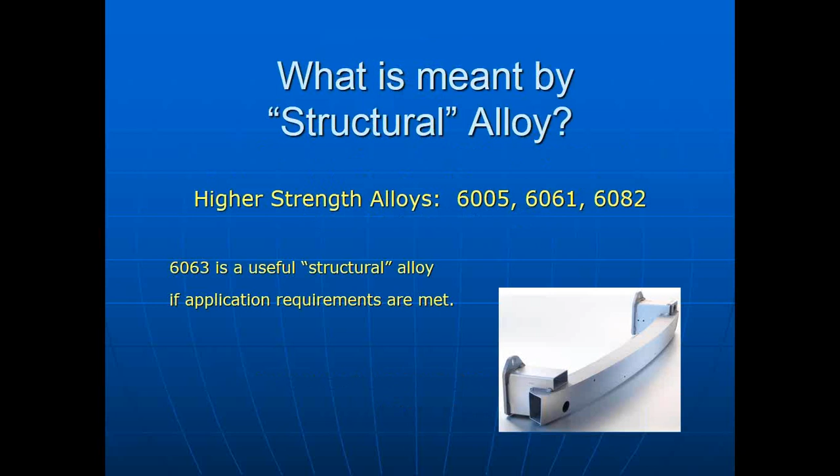So what are temper specifications? Temper specifications specify a processing regimen and then with it the associated properties. You can go on MatWeb and look up 6061 T6 and it will tell you what the minimum yield strength is, what the ultimate strength is, and those kinds of features. The first two letters are the general category, and then additional numbers in the sequence are more specific processing.

So let's look at those. T0 is fully annealed. As the product exits the quench, the profile, it will be in a T0 state. It will have no grain structure, and it should be fully solutionized and not have any precipitates.

T4 is the specification for natural aging. The 6000 series of alloys, if left at room temperature, will harden naturally over time and will reach T4 properties. It will be over an extended period of time. It's not very practical for commercial applications, so you very seldom see this specification used.

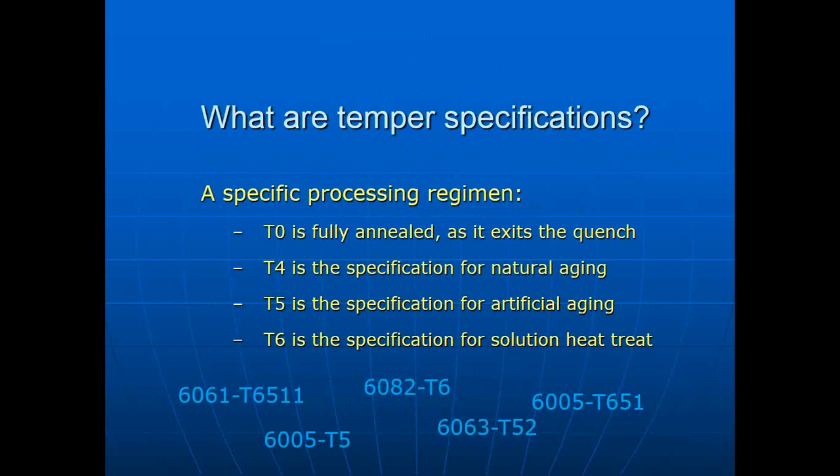T6 is the specification for solution heat treat. That, in all alloys except 6000, requires a secondary step for solution heat treat. With the 6000 series of alloys, T6 becomes a properties specification. The values for strength and hardness are higher than for T5, and there's an implied method of processing.

T6 means solution heat treat, but in the ASTM specification there's what's called footnote 9, which says 6000 series does not require solution heat treat. So the processing method is not mandatory with 6000 series alloys. What this means is that you may do your quench process in line at the press exit.

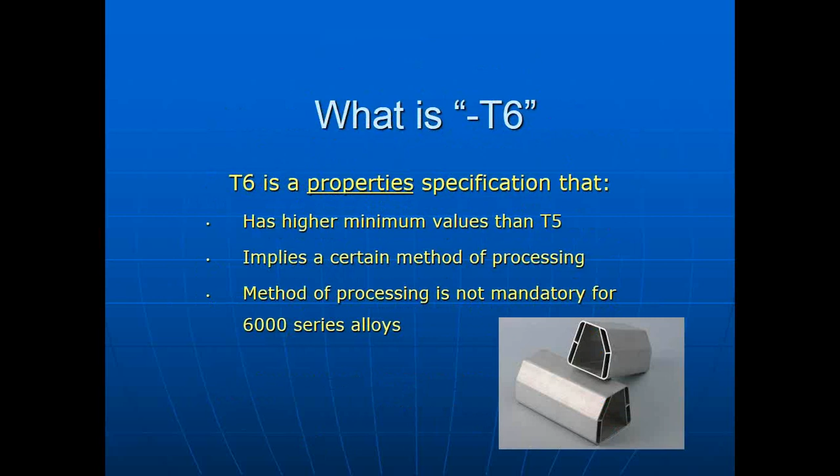And in fact, because of all the savings in labor and handling, the vast majority of 6000, essentially all of them, when you purchase a 6000 series alloy in T6, will have been through a press quench process. So it's implied solution heat treat, but really it comes back to a property specification. Are you making tensile? Are you making hardness? And so on.

We're going to be talking about this press quench process and focusing most of our time on it. But I'm always careful to take a step back and note that it is not only the press quench that defines properties. And in fact, you can fail properties at 5 different stages. Let's look quickly at 1, 2, 3, and 5, and then we'll come back and focus on profile quenching.

The first is the processing of the ingot, billet or log. The structural alloys are very sensitive to precipitation, growth of mag silicide, again, we're going to get into that in a minute, between 600F and 800F. And if you have reason in your heating equipment to hold a log in that range for some period of time, you will develop large enough precipitates that you will not be able to resolutionize as you go through the press, and it will lead to product failures.

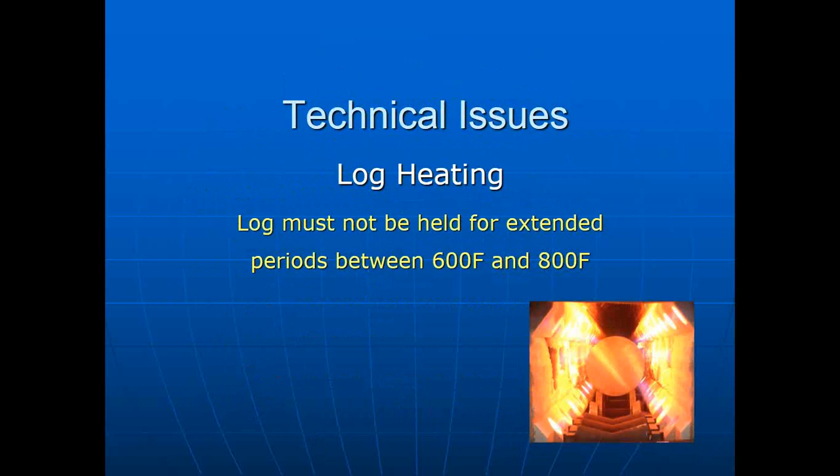The intent with the structural alloys is to return all magnesium and silicon into solution as the metal flows over the bearing surfaces in the press, and specifically in the die inside the press. You have tremendous heat from deformation as you're going through the bearing surfaces, and that normally will return the magnesium and silicon back into solution. We have minimum temperatures to achieve that. They're different for each alloy. 6061, a very common structural alloy, is 1010 Fahrenheit.

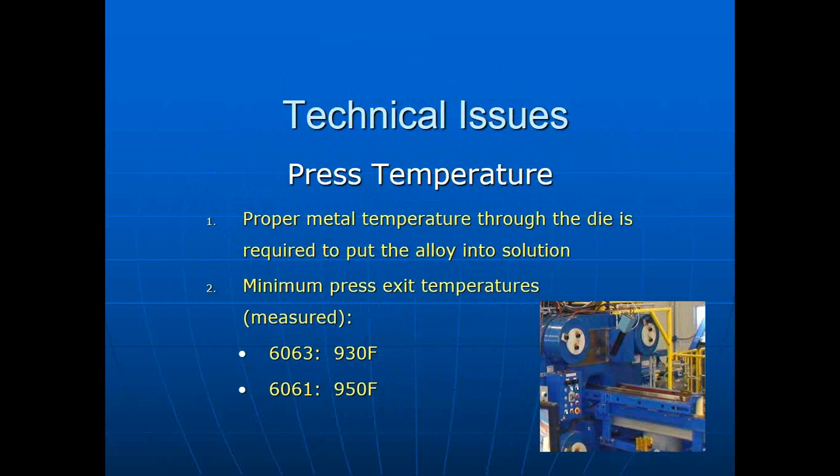The problem is that there's no good way to measure that temperature because the profile is touching all the bearing surfaces as it flows through. There's no external observation point. You can't put a port on the side of it and look in because the bearing surfaces are forming the part. So what is used commonly by your suppliers is the exit temperature from the press. So we observe the temperature as the material comes out of the press, and from that we draw the inference as to the temperature that it went across the bearing surfaces. And very commonly used for 6061 is 950 Fahrenheit. We're looking for an exit from the press above 950 to assure that we got the 1010 back in over the bearing surfaces in the die.

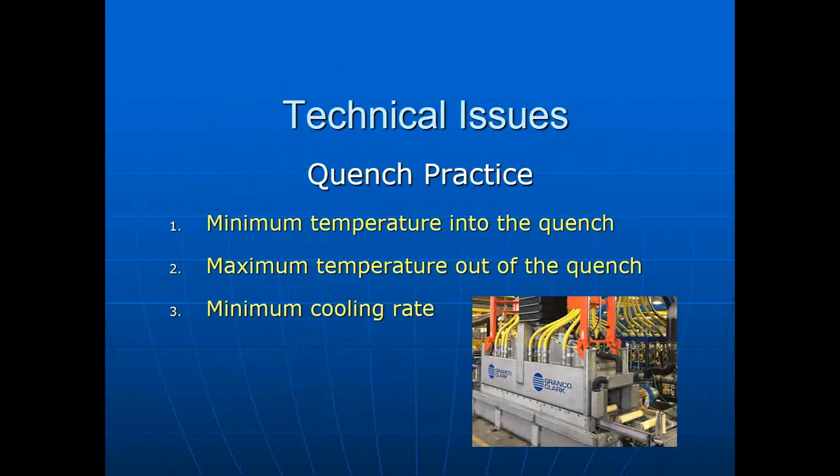Quench practice we're going to focus on extensively, but we will come back to these three primary factors. There's a minimum temperature into the quench. It has to come in hot. There's a maximum temperature out of the quench. It has to come out colder than a temperature. And we need a specified cooling rate between the two. And again, we'll come back to this.

Then, once the lineals are extruded and cut into mill lengths, they're run through an artificial age practice. Artificial age is required to meet T5 or T6 properties. Age practice fails by either overaging or by underaging. So there's a specified window that has to be met. And finally, floor age or delay between the time a lineal is extruded and when it goes into the age oven will impact properties. And this is especially true of the alloys with excess magnesium like 6061 and 6351.

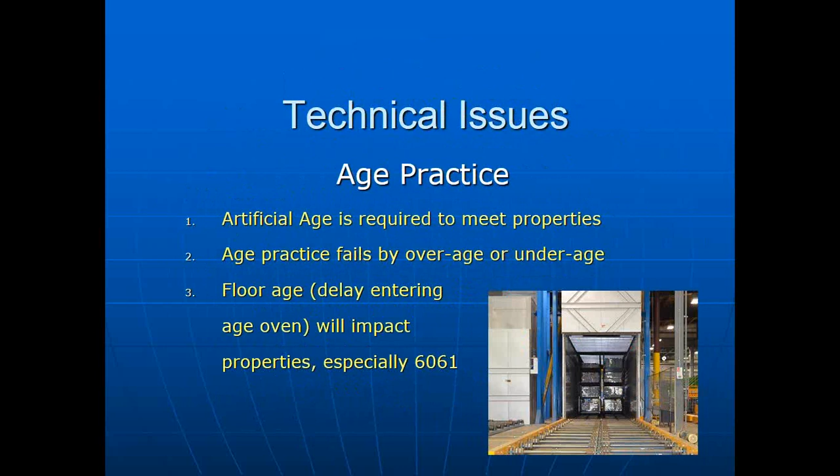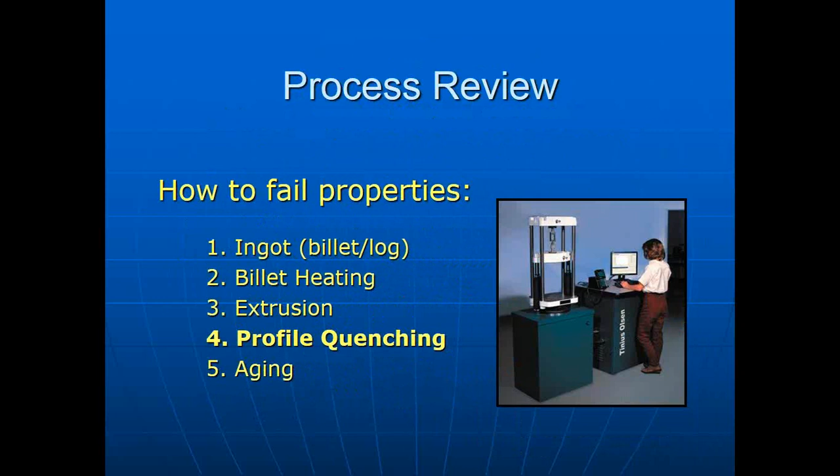So we've looked at the other four in overview. And again, just as a reminder, every step has to be done properly. There is no effective remediation, okay? If I don't get the extrusion temperatures right, I can't at the age oven fix the problem. If I don't get the quenching right, I can't at the age oven remediate in some way. Every step needs to be done correctly.

The first and most important concept in press quenching of 6000 series alloys, which is very different than if you're coming, say, from the steel industry, is that quenching is a preventative process. It is not an active process. It does not give you properties. It prevents the growth of undesirable characteristics. And that sort of turns it on its head if you've done anything around quenching with steel, because quenching here is a purely preventative process. It accomplishes nothing, literally. But if you don't have it, you'll get something you don't want.

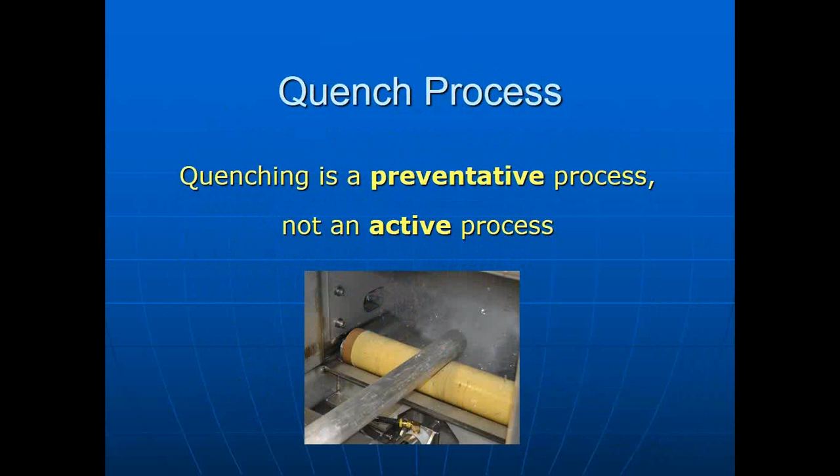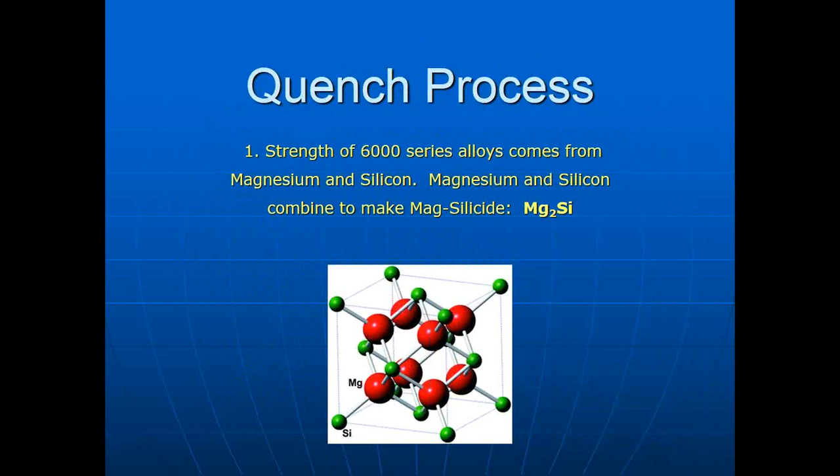The strength of 6000 series alloys comes from the primary alloying materials of magnesium and silicon. Magnesium and silicon combine to make mag silicide, or Mg2Si. You'll hear me typically call it mag silicide. And this is the alloying material that provides the strength in 6000 series alloys. Meeting properties requires fine mag silicide precipitates well distributed throughout the profile.

And the best illustration I have of this is sand versus boulders. What we want is a profile that is full of mag silicide sand but doesn't have any mag silicide boulders in it. You could compare this to cement. Portland cement, like raw aluminum, is not particularly useful. You can sort of almost grout with it, but it's not particularly useful. You put aggregate in it to make it stronger. But if you were pouring a 4-inch driveway and you threw a bunch of 3 to 4 inch diameter stones in the mix, you would have a real problem. You would have holes, you would have cracks, all kinds of problems. You need aggregate, but it has to be a lot finer. The same here. We're looking for very fine particles evenly distributed throughout the product.

If you have large chunks, that's a technical term, large chunks of mag silicide, they do two things. First, they rob mag silicide from the surrounding aluminum, which weakens it, and then they form a stress riser, so it's a place for the crack to propagate. So large precipitates are not desirable.

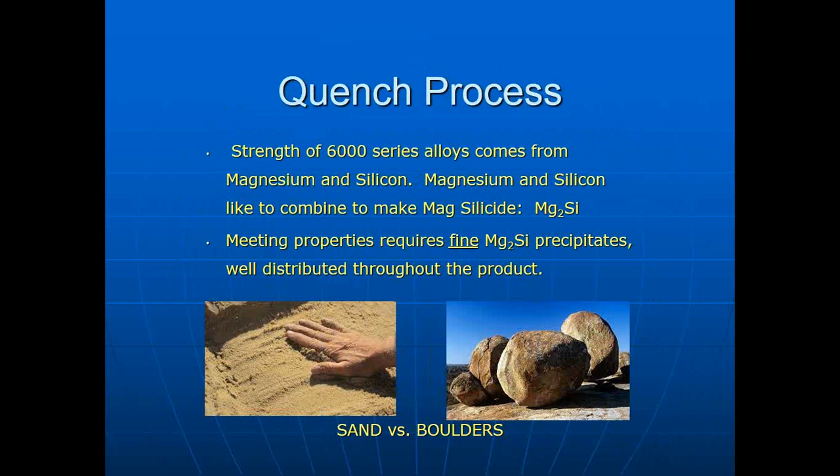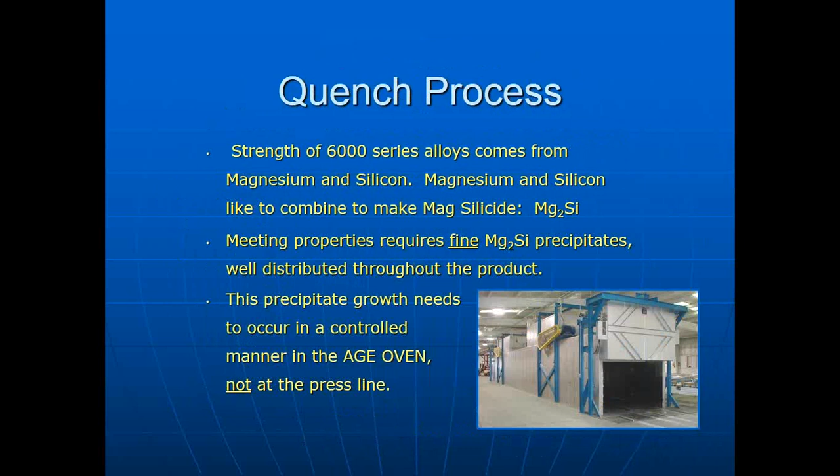Where we grow the fine precipitates, the sand, is in a controlled manner in the age oven and not at the press line. So the goal of our quench is, ideally, to have zero precipitates at the press line and do all the work in the age oven. Now, as a practical standpoint, obviously, we can't do things instantaneously, so there are some precipitates, but we very much want to minimize precipitates on the press line. So how do we minimize precipitates on the press line? We have a roadmap. Our industry uses a roadmap called the C-curve, or the C-curve graph.

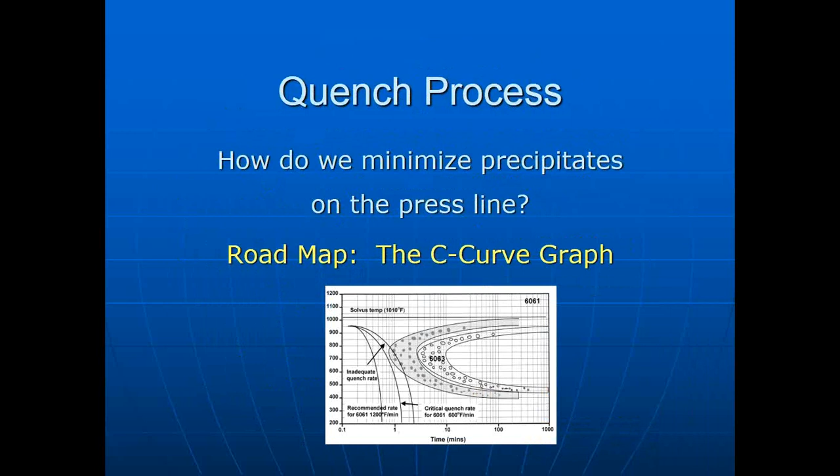Let's zoom in on this and take a look at it. Every alloy has its own C-curve, and we see two of them in this C-curve chart, because this particular chart that I got courtesy of Rio Tinto, which is the current name for Alcan aluminum, contrasts 6063 alloy in the pale curve and 6061 in the shaded curve. Important things about a C-curve: on the left side you see the temperature scale, and it is linear. On the bottom, you see the time scale, and it is logarithmic. And that's important to note because the 63 and the 61 graphs, for instance, don't look all that different. But if you look at the nose, the point of the C-curve right out here, the 6063 represents 3 minutes, and the 6061 represents 40 seconds.

These regions, these bounded regions, are where you will have unacceptable precipitation. If you hold a 6061 lineal at 650 degrees for 40 seconds, you're done. That profile will not make properties. You will have grown too many stones and boulders, and again, it's not remediatable in a practical way. This graph shows that very well. I will go to the next slide for that.

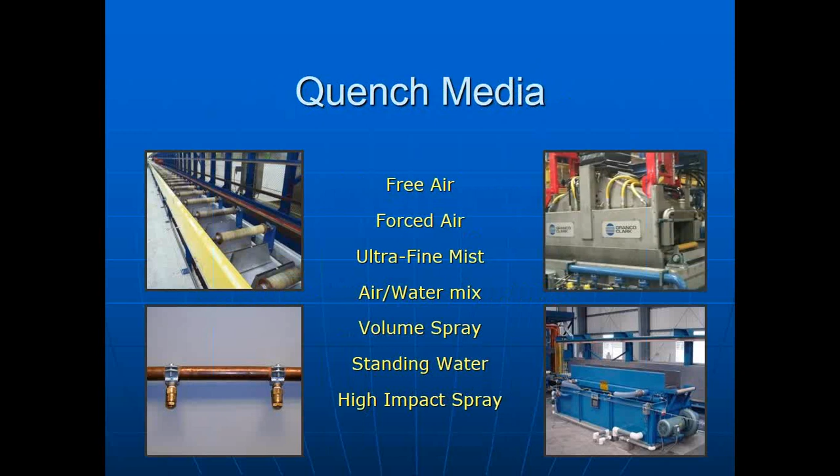As we move down, then we get to forced air. Forced air is very useful. You can do a lot of cooling. The performance metric is velocity at the part. You can compare two air cooling systems if you can determine the velocity at the part in each one. If the velocity at the part is 5,000 feet a minute on this one and 6,000 feet a minute on that one, the 6,000 is going to cool more than the 5,000.

There's a couple of key formulas that I listed there. Cooling rate is velocity to the 0.7 power. But horsepower is velocity cubed. And noise is velocity to the 4. At some point, these turn into whistles. What these numbers do is they give us a practical maximum of forced air of about 10,000 feet per minute. If you're running much faster than that, your horsepower gets crazy, the nozzles get very noisy,

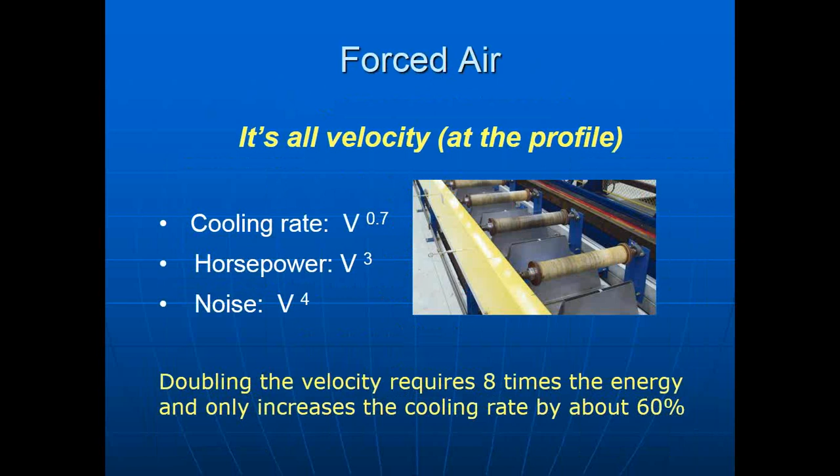lots of problems. And to illustrate where these numbers end up, if you double the velocity, as at the bottom of the slide, it requires 8 times the horsepower, and your cooling increases 62%. So you don't even get a doubling of cooling rate for 8 times the power. So at some point, multi-hundred horsepower fans, it just gets crazy. So we need to move beyond forced air. Forced air typically can only work for the very thinnest of structural profiles. With 6005, I have some customers who are making properties with forced air, but as soon as you get to 6061 or 6082, you're looking at doing something beyond forced air.

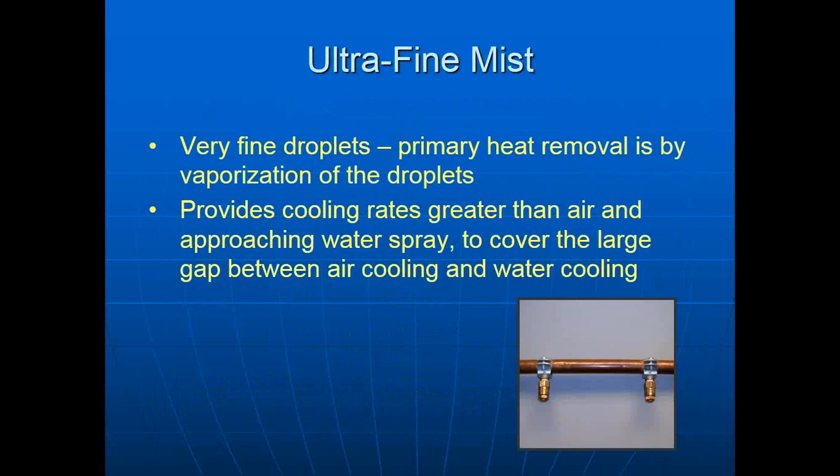We have incorporated in some of our units an ultrafine mist system. The ultrafine mist uses nozzles that create very fine droplets, and the primary heat removal is actually the vaporization of the droplets. If you calculate the temperature of the mist, you'd think it shouldn't be able to do that. But what's happening is you're actually flashing off the droplets and creating cooling rates approaching that of a traditional water spray. We did that to span the gap from the maximum air cooling and the minimum water cooling, because there's a big gap between those two, and that can be partially filled with an ultrafine mist subsystem.

The next step then is water spray. These would be larger nozzles, and this would look more like a traditional spray that you would think of, hundreds of gallons per minute. With the spray nozzles, you have the ability to adjust cooling rate. You can adjust the flow, adjust the volume, select which nozzles are on and off, which gives you ability to direct the spray and have some controllability.

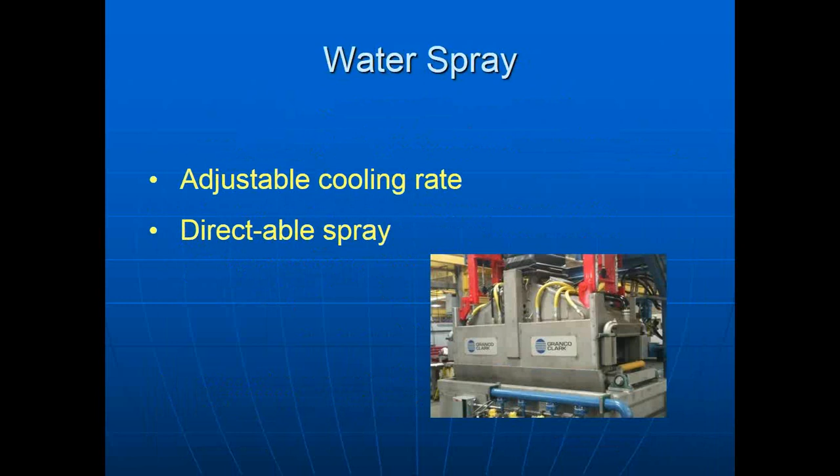Moving up from spray is the flood quench. This comes in the water wall style, where the profile flows into and out of a standing wave of water, and also the dip quench, where the entire profile is dipped in a trough located typically next to the lead out. So the profile, after it's produced, is dipped in its entirety into the trough and removed.

Flood quenches have quite a good average heat transfer rate. Their big limitation, and the reason why they have fallen out of favor in the industry, is there is no control of cooling rate or anything else. You put it in the water, it comes out. What you get is what you get. And you have no adjustability. So while they cool quite well, if you're wrestling with geometry, distortion, and such things, you really don't have any tools to address them.

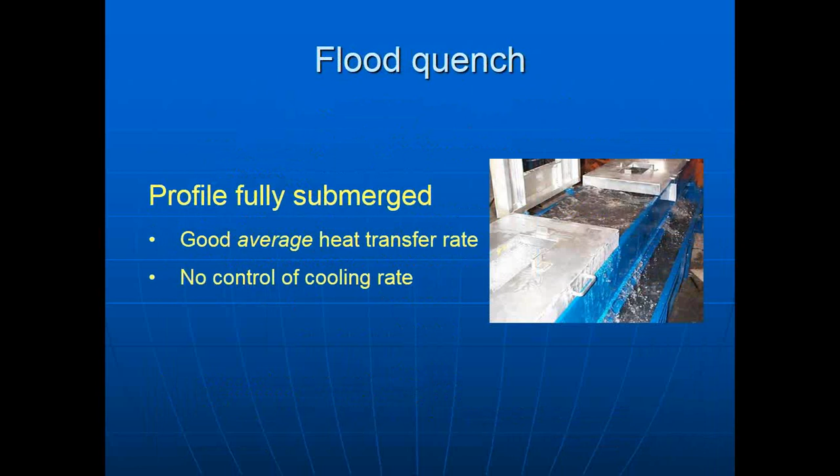Finally, the highest performance system is high pressure or high impact velocity spray. Here, the water droplets are accelerated fast enough that they affect the steam barrier that forms around the part and provide the maximum heat transfer rate that's available.

In our case, we share the same nozzle array as our standard spray. So we can give you a normal water spray and a high pressure spray with a single set of nozzles just by changing the pressure. But by knocking down the steam barrier or allowing the steam barrier to reform, you have some very significantly different performance characteristics. So it really is like having two completely different modes or medias, even though it's the same nozzle.

Again, you have directable spray. You can select the pressure, you can select the direction, you can turn off nozzles entirely, so you have some control. Those are the typical design options for press quenches.

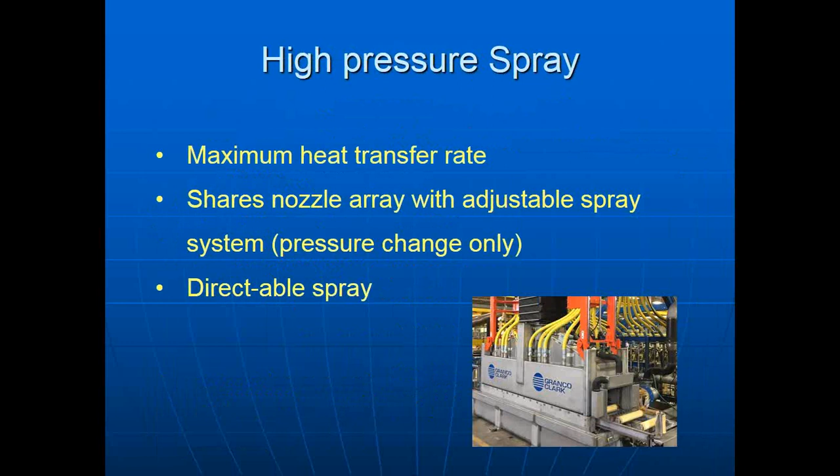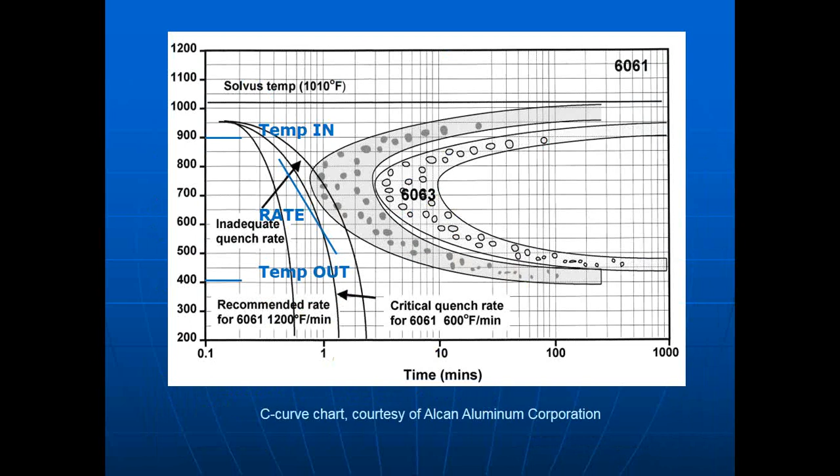So how do we assure properties at the press quench? The three properties we talked about before: temp in, rate, and temp out. Quench rate, entry temperature, exit temperature. Every alloy has a critical quench rate. Here we see a list. 6061 is probably the most common structural alloy, although automotive is using a lot of 6082 now. And we see 20 degrees a second, even 40 degrees a second. Each alloy has its own requirements.

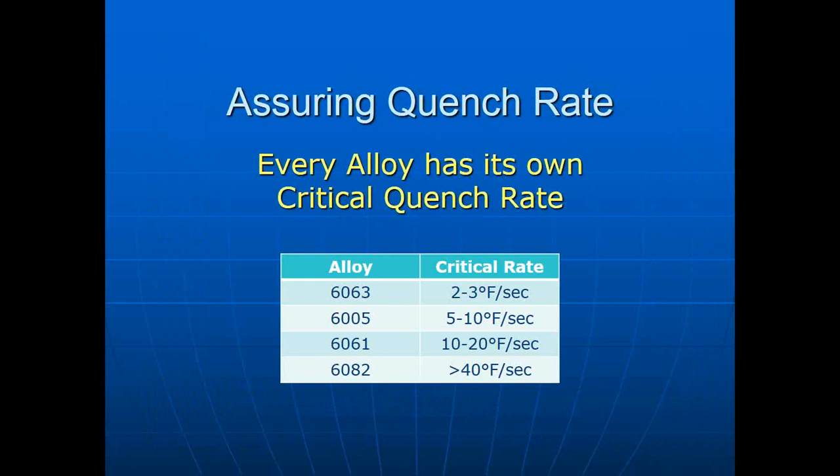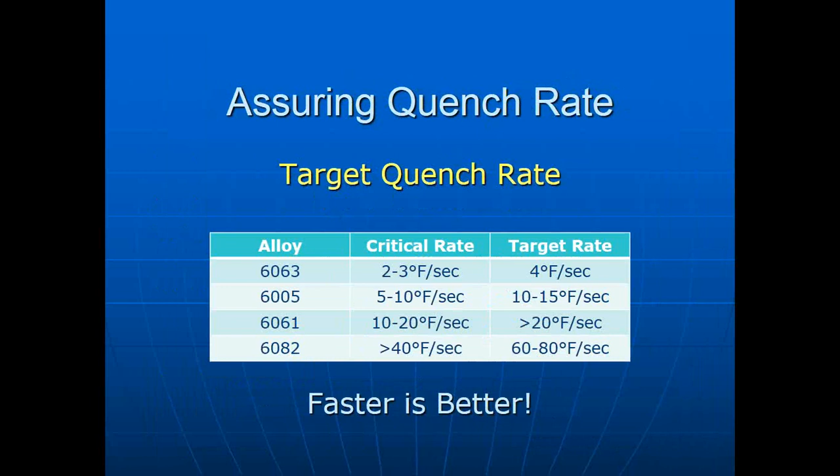There are some new extrusion alloys coming out that have even higher requirements. We're seeing requirements in excess of 100 degrees per second with certain specialty alloys. As before, faster is better. Our targeted quench rate is typically double the critical rate because we don't want to get anywhere near the nose of the C-curve. When we get near the C-curve, we're threatening our final mechanical properties.

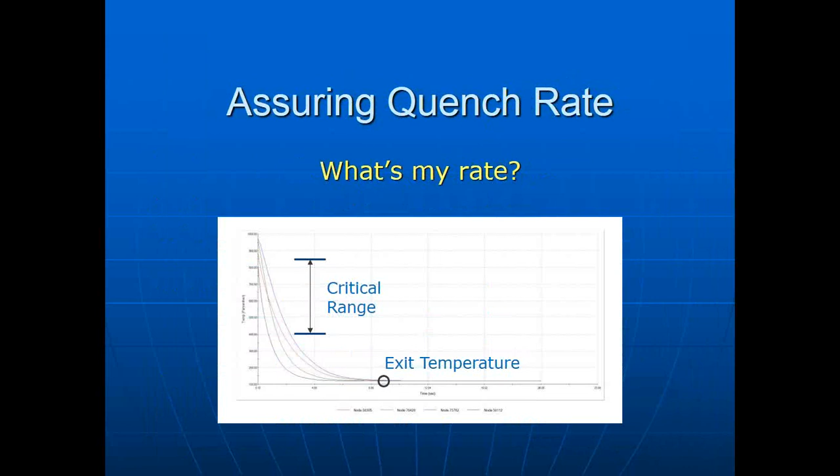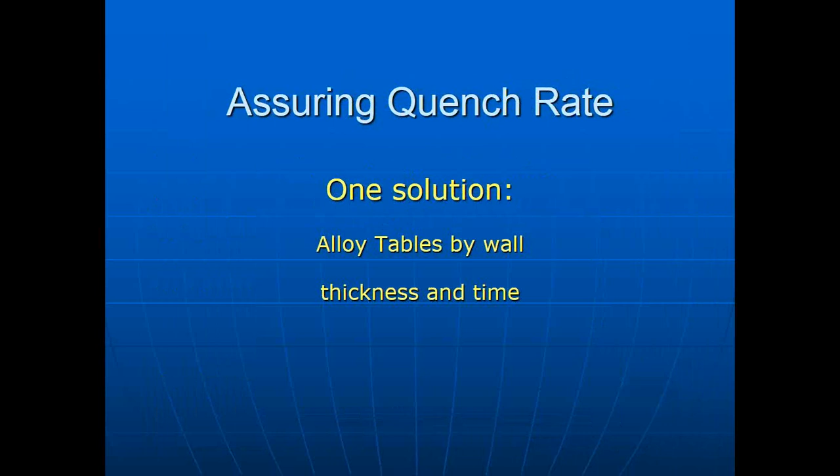My recommendation, one way to define rates is to create an alloy table. This is specific to one particular press line, one particular quench, because the performance of that quench will dictate the chart. But we can experimentally lay out an alloy table by wall thickness and time, and then the operators can use that as the assurance tool. If you're meeting the wall thickness and time specifications, you will assure your product performance at the quench.

So an operator can look at this and say, okay, I can't, or the sales department for that matter says, okay, I can't run anything heavier than a 1 inch wall on this press and make properties in 6061.

The alloy table also provides speed information. How fast can I run this? Well, if I'm running a half-inch wall, I need to spend 17 seconds inside the quench. If I'm running so fast that I'm only spending 12 seconds inside the quench, it's going to come out hot.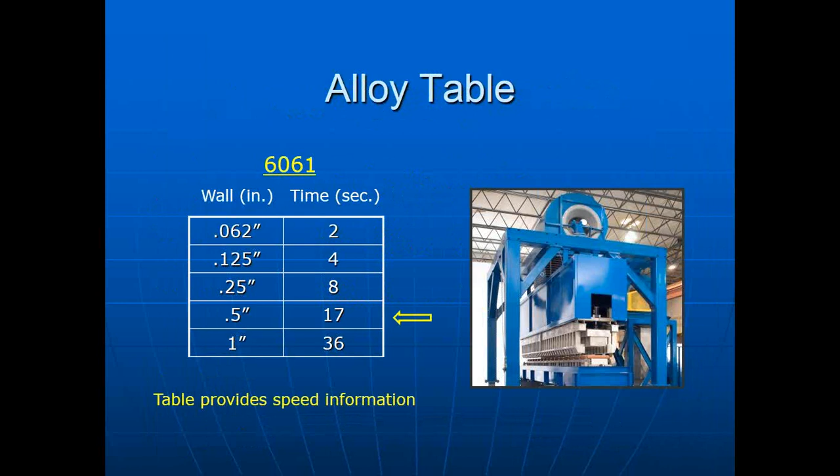So I like the alloy table. It's simple. It's something that can be used throughout the organization, and gives us a clear definition of what we can do, and more specifically, what we can't do.

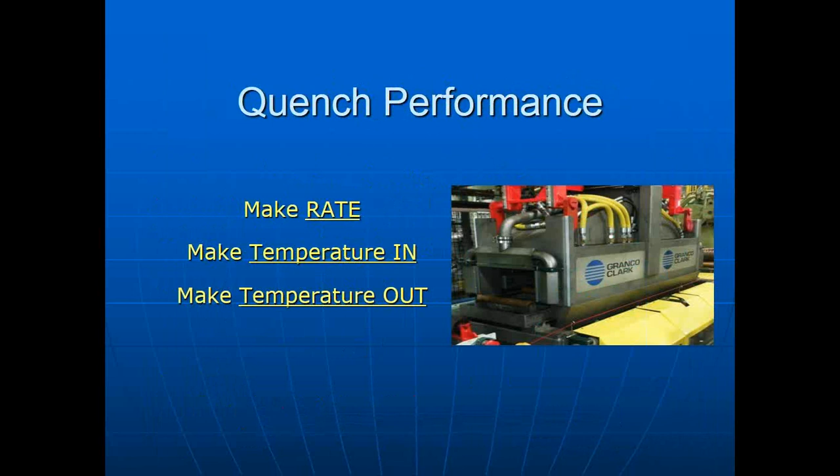Again, a review on quench performance. I've seen this before. Make rate. Make temperature in, that's a minimum, and then make temperature out, that's a maximum. Earlier I said that for properties, faster is better.

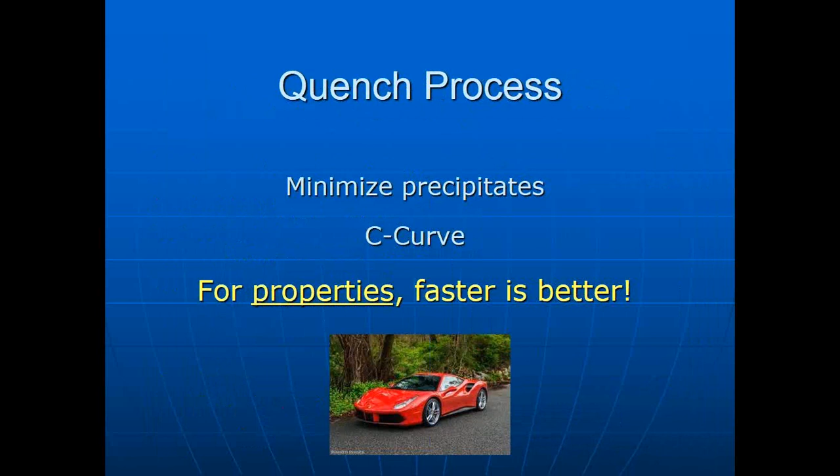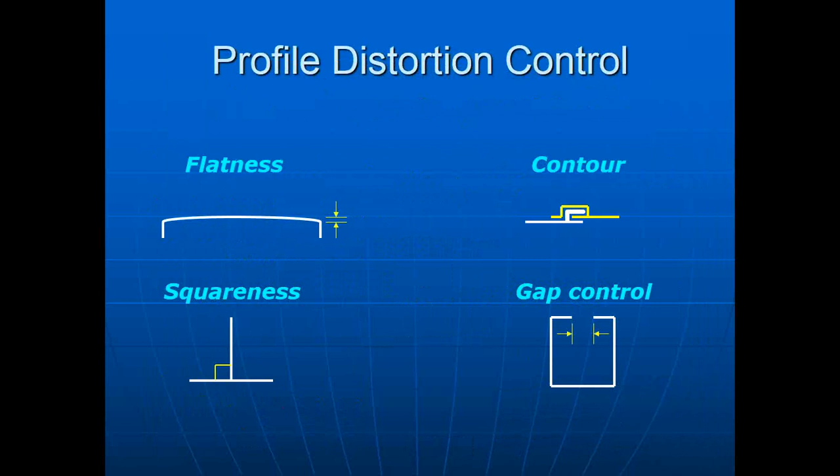But what happens if I have interesting profiles? What happens if I have a flatness specification, a squareness specification, a contour issue where I have two contours that have to slide one inside the other, or if I have a critical gap clearance? If I cool rapidly, I run the threat of distorting the geometry permanently.

How do you do permanent profile distortion? Permanent geometry distortion occurs when, at an instant in time, the mechanical stress induced by the quench exceeds the yield strength of the material at the current temperature. Now, the white words are important. Our cooling rate affects how much mechanical stress is applied, but the yield strength is at the current temperature.

When the metal is hot coming out of the press, the yield strength is a couple of orders of magnitude lower than it is after it's been aged and is sent to the customer. So you can look it up in a data book and say, oh, this has 35 KSI yield strength. That's true for a fully processed shape, but you have a tiny fraction of that yield strength when the metal is hot coming out of the die. And this is where we end up facing challenges with geometry.

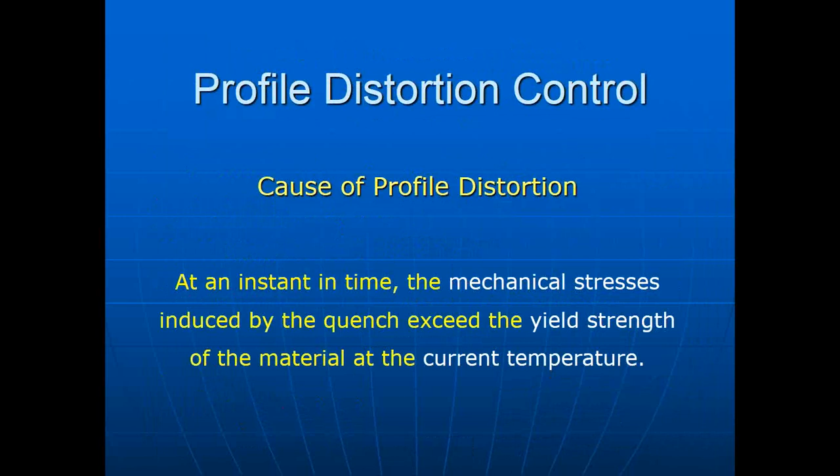I tell customers regularly, say, well, I want to be able to do everything with this quench. And I say, if you let me design the die, I can design a die you cannot quench. I've been around it long enough that I know some of the characteristics of what's challenging, and I can make a challenge you can't fix. But there are tools available for us to handle profile distortion while still making properties.

The importance of delta T, the temperature difference between the profile and the water, is a key to this understanding. Your cooling rate is delta T times your cooling mode, whatever that mode is. So let's just take an average cooling rate of 20 F per second. If we're averaging that across the quench, that means when the metal first comes in and it's at 950, we're cooling it at about 80 degrees per second.

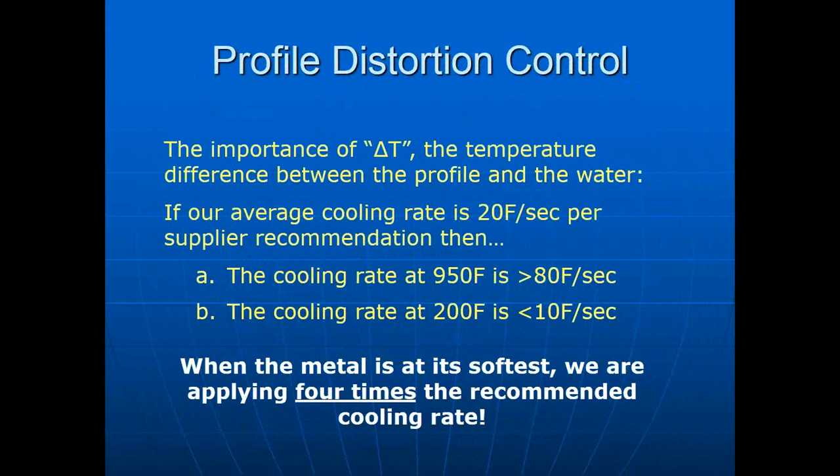And at the back end of the quench, as it's cooled off, we're cooling it at something less than 10 degrees per second. So the challenge in quenching is when the metal is at its softest, in this illustration, we are applying 4 times the recommended cooling rate. So that is the primary cause of distortion.

We see the illustration here. If we are averaging 20 degrees per second, then we have a single zone quench where it's only one media throughout the quench, one cooling rate. We're getting excessive cooling at the entry, and we're actually getting inadequate cooling at the exit.

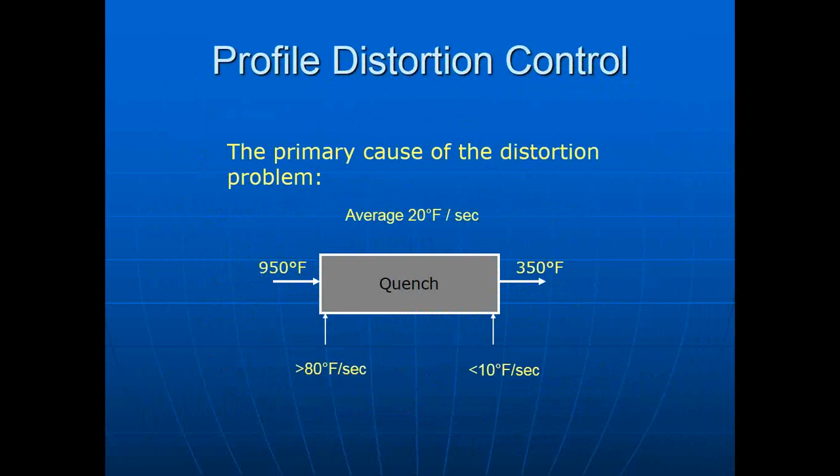The solution is progressive quenching. This involves using a quench with multiple zones and adjusting the performance of each zone.

If the specification is 20 degrees per second, in theory, what we'd like to do is have about 20 degrees per second in zone 1. We'd like to have about 20 degrees per second in zone 2, and we'd like to have about 20 degrees per second in zone 3. Actually, the biggest challenge is zone 3, because our delta T has gotten so low, it will be hardest to get 20 in the exit zone. But we can easily turn down zone 1 and zone 2, so our average temperature is actually our sequential temperature.

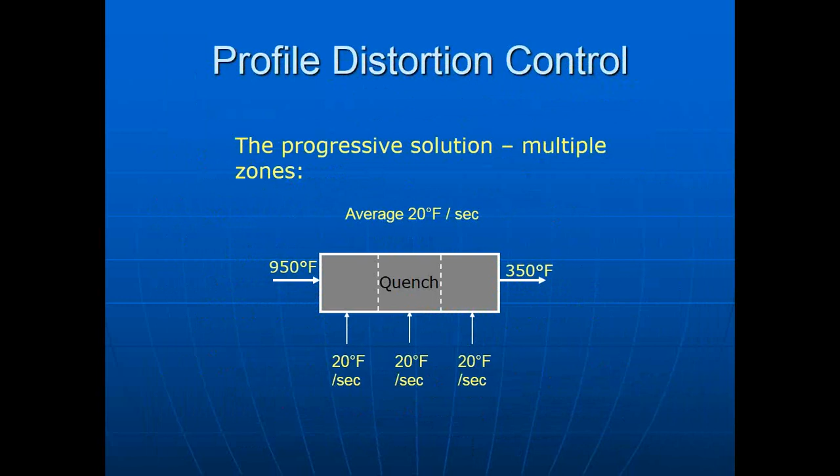And this is the tool that allows the making of mechanical properties and the maintenance of the profile geometry. We see that as we look at the C-curve, that critical temperature range where we want to pass as quickly as possible is from something in the low 800s to something in the upper 600s. This is the supercritical range.

This is the range where we want to rapidly transition this zone. What that leaves us is the area above that. In this area, we can be a little more gentle and still make properties. So our entry zone is the place where we can manage any geometry issues.

Again, from a property standpoint, faster is better. If you have a solid rod you're running through this quench, run all the quench you can. Fine. But when you struggle with geometry problems, you go to the entry zone of the quench and you turn down the performance of the entry zone in order to minimize the deformation of the geometry.

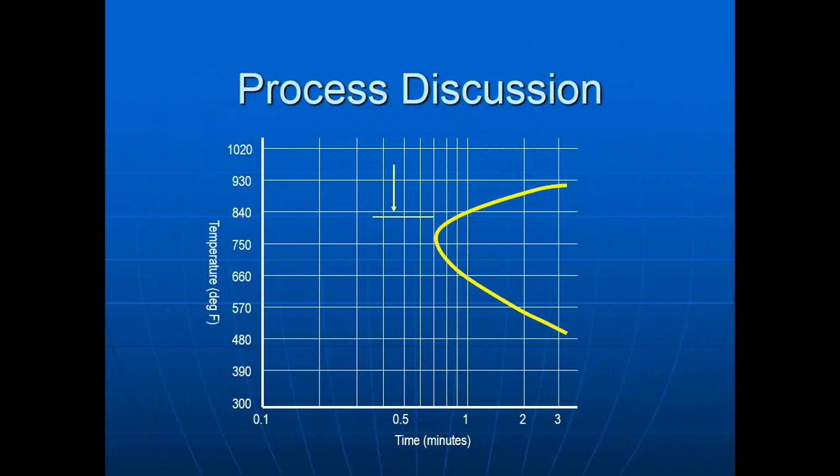What I like best about this as a factory process guy is the tools that it provides to the operator. In the old days, and I'm old enough to remember the old days, what we told operators was you need to cool it fast enough to make properties, but not so fast that you distort it. Which is kind of like telling a pitcher, don't give him anything he can hit, but don't walk him. It really was sort of a cognitive dissonance thing for the operators.

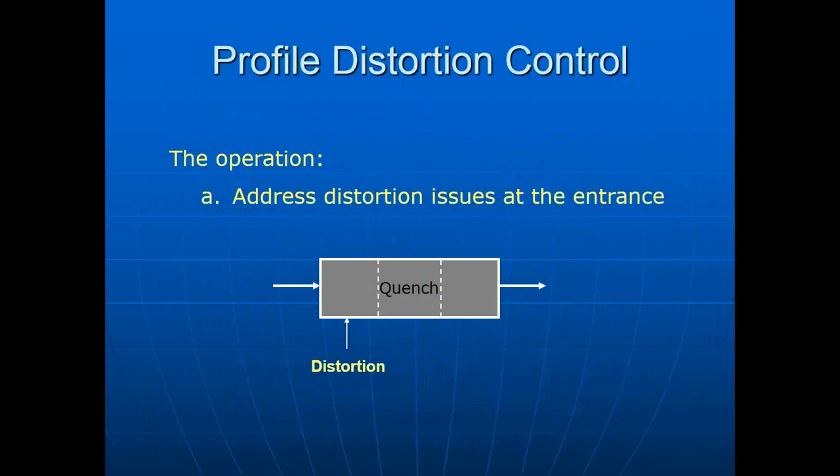With the progressive quenching approach, you can very easily teach operators what to do. You address distortion issues in the entry zone of the quench. You address the properties issues downstream. If you're not making properties, you increase the cooling rate in the downstream zones first. And only then do you begin to increase the cooling rate in the entry zone.

By contrast, if you are struggling with a geometry issue, you only go to zone 1 of the quench and turn down the cooling rate there. You don't turn down the rest of the quench because, again, that's where you have the highest delta T, the highest cooling rate will occur as the profile enters the quench, and it is also where the metal is the softest because it's hottest.

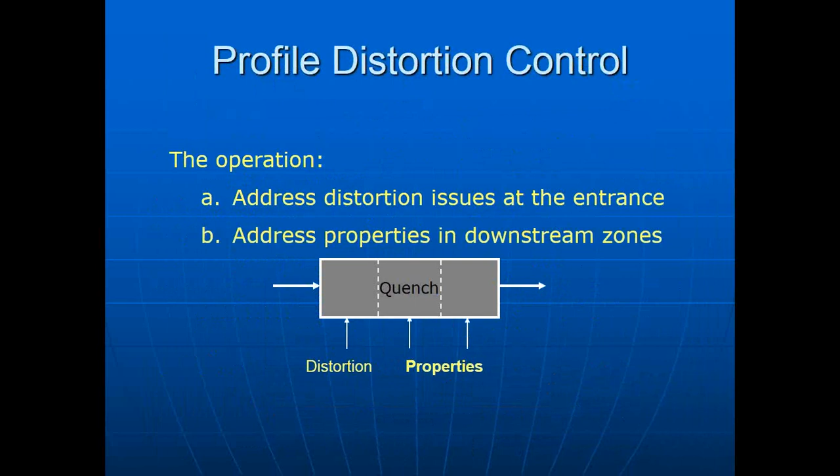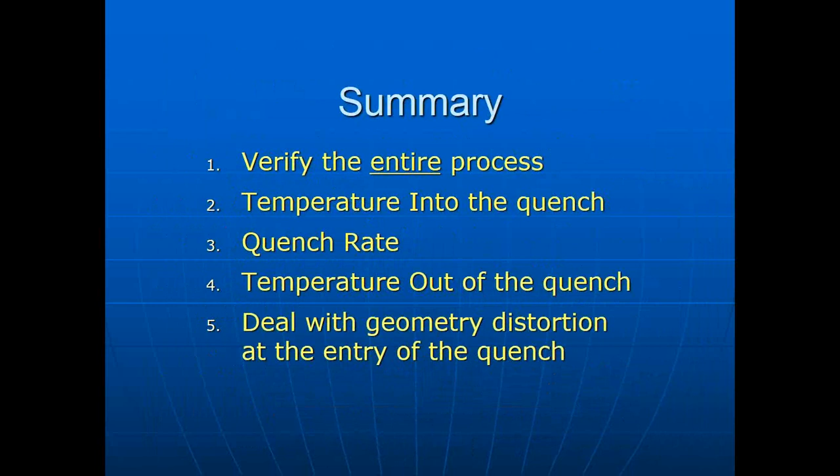So to summarize our discussion today, if we face issues with properties or geometry with a structural alloy, we want to verify the entire process. Do not assume it is a quench problem. We need to make certain the entire process is in control. We need to verify that the temperature into the quench is high enough. We need to evaluate the quench rate. We need to make certain that the temperature out of the quench is low enough. And we need to deal with any issues of geometry distortion at the entry to the quench.